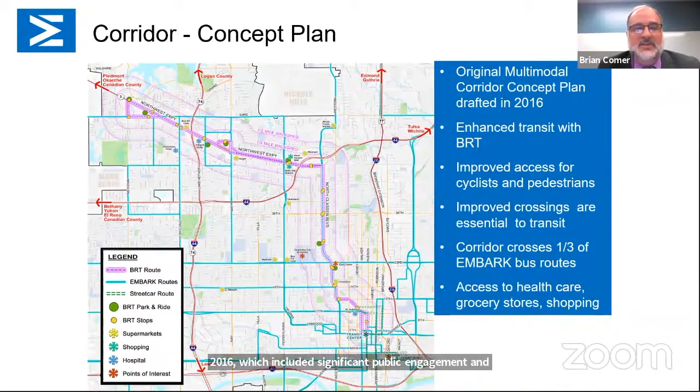The design efforts for the Northwest BRT rely heavily on past planning efforts. Jason mentioned the recent public engagement as part of the design process, but it goes all the way back to the multimodal concept plan in 2015 and 2016, which included significant public engagement and defined the preliminary route and station locations, as well as connections to major activity centers along the corridor.

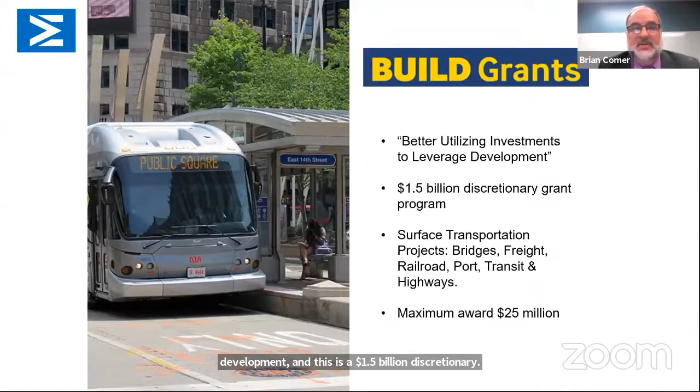The BRT is funded 50% through the BUILD grant, which stands for Better Utilizing Investments to Leverage Development. This is a $1.5 billion discretionary grant program through USDOT, funding a wide variety of infrastructure and transportation projects, including transit.

The project total budget is $28.8 million. 50% is funded through that BUILD grant, as Jason mentioned, and 50% through local match.

So the BRT system includes many different elements that I've touched on before. The first big enhancement we'd like to touch on is the technology enhancements, including transit signal priority.

And this is something that's significantly improved running times for the OKC streetcar and will also be included as part of the project on the Northwest BRT.

TSP uses technology to reduce dwell times at traffic signals for the transit vehicles by extending the green light time or reducing the red time at a given signal as the vehicle approaches.

The system will also include several enhancements to make the service more efficient, including bus pull-offs to improve system reliability and safety, and queue jumps that will allow the transit vehicle and emergency vehicles to bypass traffic and clear the intersection through a dedicated turn lane.

The BRT service will include improved service frequency, 15 minutes within the peak period, branded vehicles, level boarding platforms, and the BRT line is approximately 8 miles long and will include 16 station pairs and three potential park and rides.

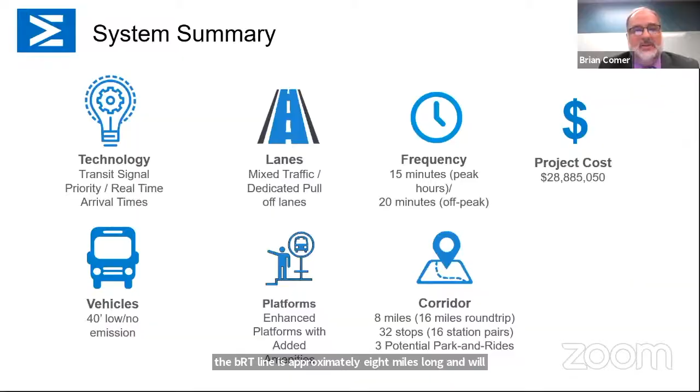Each BRT station will include a raised platform for level boarding with ADA ramps at each end of the platform, and the platform will include amenities and will be ADA accessible.

The platform will include a shelter with seating and a specially branded pylon, and the pylon will be visible from a significant distance and will serve as a landmark and wayfinding for pedestrians and cyclists looking for a BRT stop.

The pylon will include real-time information display to let you know when the next bus is arriving, provide additional information for transit customers, and potentially advertising.

Each station will include a ticket kiosk where you can purchase your fare prior to boarding the bus, a litter receptacle, and along with at least one bike rack. We would like to accommodate 2 bike racks depending upon each station and where we can fit those in.

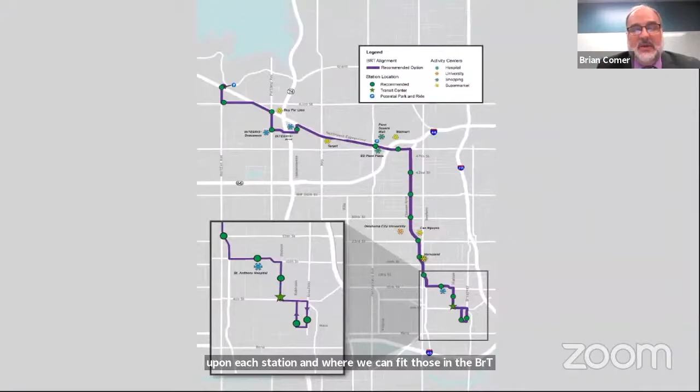The BRT alignment will run mainly along the Northwest Expressway and Classen Boulevard, and the route serves 3 hospitals, several residential neighborhoods, and provides an important connection to downtown.

The Northwest BRT, all the way back to the concept plan, is designed to serve areas of relatively high employment and population density within the Northwest corridor.

The route will come within half mile of 91,000 jobs and 23% of Oklahoma City's employment base. The route also comes within a half mile of 40,000 residents and provides the ability to connect many more residents through park and ride opportunities, especially to serve that growing Northwest region.

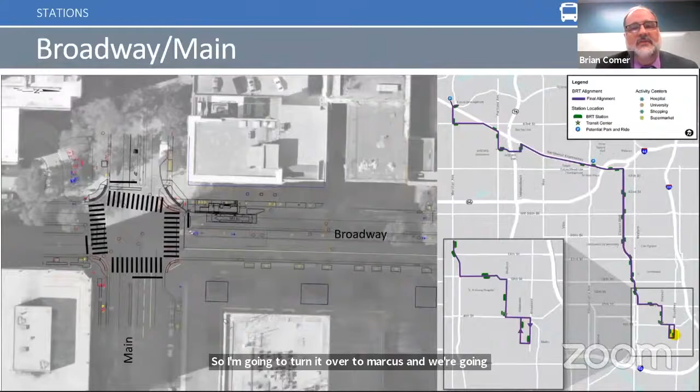So I'm going to turn it over to Marcus, and we're going to quickly walk through each of the station locations. Thanks, Brian. I guess you guys can hear me okay? Yes. Great. So thank you for the opportunity to come today and talk regarding the route and each of these individual station locations.

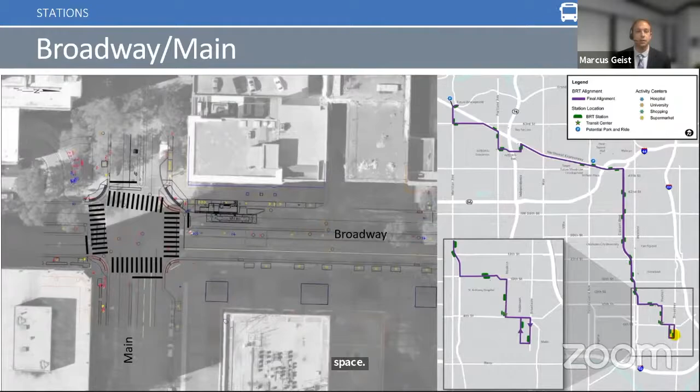So we'll turn now and go down Main and back up Robinson now. So here we're back on Robinson and Park. We're northbound on Robinson, just north of Park. And again, the station is located in the existing street parking.

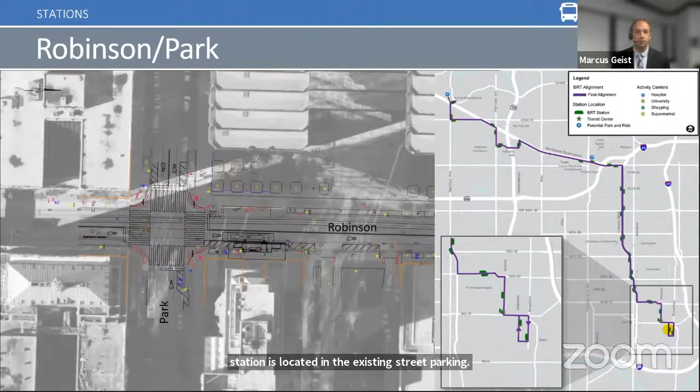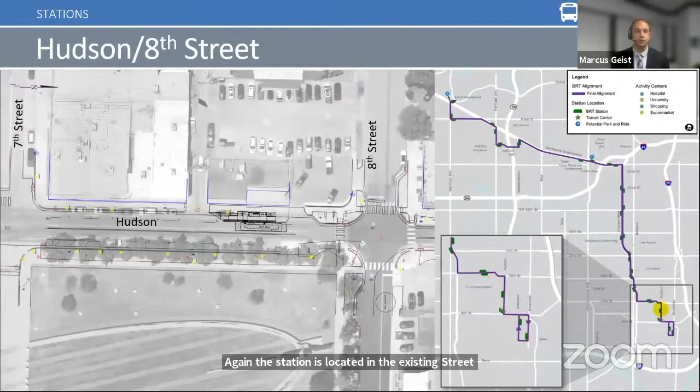Again, the station is located in the existing street parking spot. As we continue north and now to 10th and Dewey, it's between Lee and Dewey. Our inbound and outbound station are located in the Parkway and are directly across from one another, leveraging that mid-block crossing that's there today, right out in front of St. Anthony Hospital. We'll continue on now.

One thing that's unique here is that it's very similar to 4th and Robinson, where the bike lane that will be constructed as part of this project from 10th to 16th is going to be in the outside lane of Classen. The outside lane today is underutilized from a vehicle standpoint. And to prevent that conflict point at the actual station, the bike lane will actually go right behind the station and then continue along Classen. So while not shown, the bike lanes here, a part of this project, are from 10th to 16th.

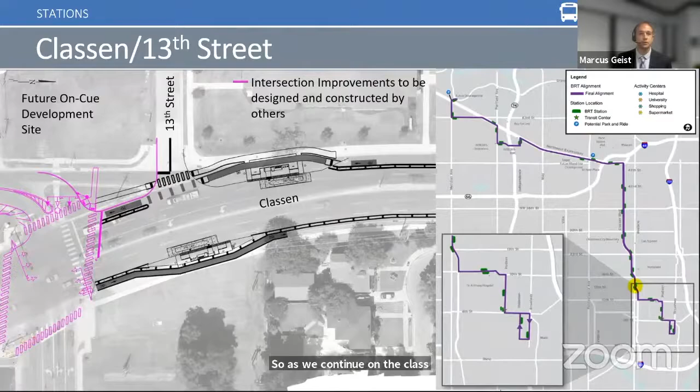So as we continue on to Classen and 18th. So here you have the inbound station located kind of in that island there, just north of 17th, with a crossing that gets pedestrians back to the signal at 18th. The outbound station here is located just outside of the Homeland grocery store.

So continuing on to 23rd, here you'll see both the inbound and outbound are on the far side of the intersection for the direction of travel, but they're also expected to be high ridership here. So one thing that's unique about this, and Brian had showed the standard station rendering, we do have a high ridership station where basically you have the same amenities, but you have a double shelter. So you have twice as big a shelter because of the anticipated folks from the traditional bus service that are going to intersect here and leverage the BRT service. So therefore, again, 2 shelters, 2 benches, and 2 ADA staging areas, really focusing on getting pedestrians back to the intersection and making sure that everything you'll see here is all ADA compliant.

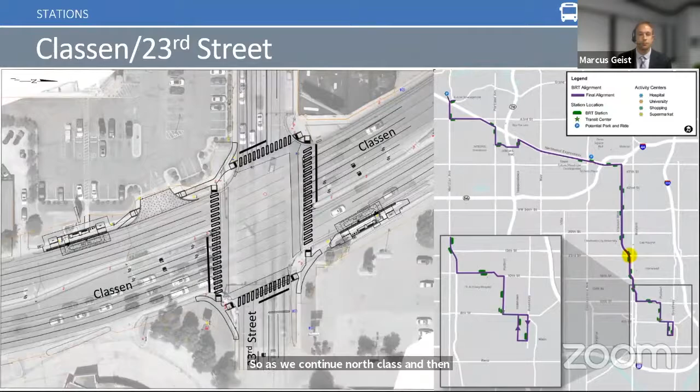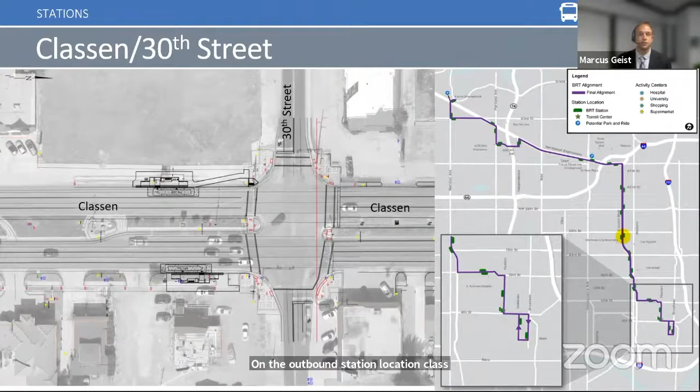So as we continue north to Classen and 30th, both of these stations as shown are located on the south side. We're working with local property owners here to understand and make sure we're modifying the appropriate driveways on the outbound station location. Classen and 36th as we continue. Here's both standard stations, both on the far side of the intersections. Continuing on to 42nd.

42nd has a unique opportunity here because just outside of NewView, on the upper side or the west side of the screen, it's assisting the visually impaired folks. So we want to make sure we've got an extremely clear and safe place for folks to cross to get to NewView and back to the stations. And we're still working with Public Works to select whether a full signal at 42nd or a mid-block crossing with a signal is best to facilitate that crossing to and from the NewView facility.

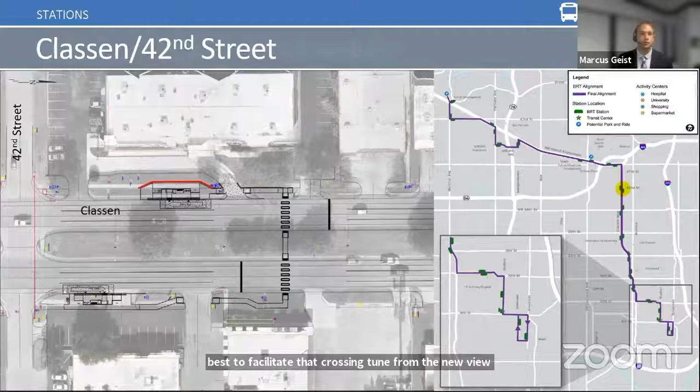We'll continue on then to Northwest Expressway and Blackwelder. So we've gone north up Classen. Now we've made the left. This is one of the locations where we have a right lane queue jump to go from the outside right lane to turn left onto Northwest Expressway.

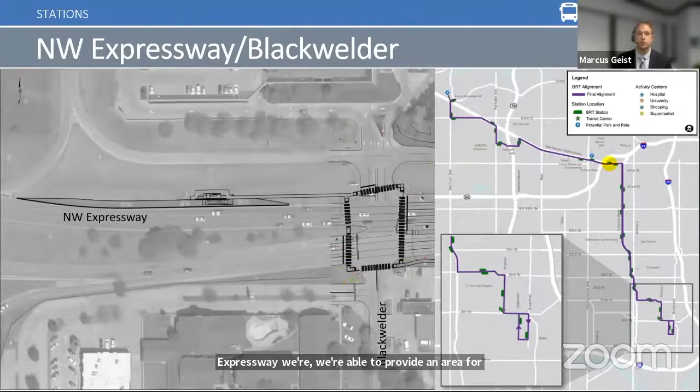The inbound station here is located in a bus pull-off area, so you'll see a common theme along Northwest Expressway where we're able to provide an area for the bus to safely pull over, board and alight, get the bus back up to speed, find a gap to merge into traffic, and again, provide that sidewalk connection to the nearest intersection. As shown here, the outbound station, just on the west side of Blackwelder, operates in a very similar manner where we have that bus pull-off zone. Again, it connects back to the intersection and provides that connectivity from a sidewalk standpoint.

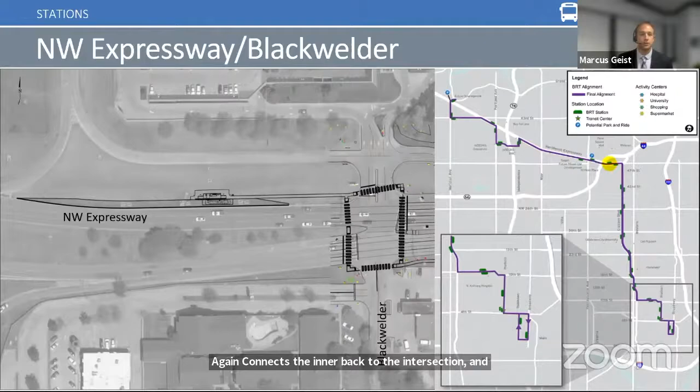As we continue now to Northwest Expressway and Penn, this station is just out in front of the Penn Square Mall. The station is positioned to accommodate an extra through lane. So again, working with Public Works and understanding the long-term plan here about having that future expansion, making sure that we're building this station in the right location to where it's not in the way for future widening.

Again, there were several park and ride locations that Brian talked about. This is just one of the general areas that will have a park and ride. So the inbound station here is on the west side of Penn. Again, similar scenario here. It's positioned out for future widening along Northwest and provides that bus pull-off area. So we'll continue down Northwest and head north on Independence.

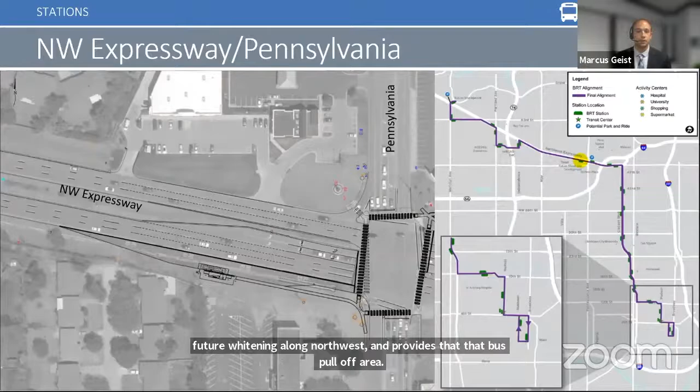So here, the stations are located just south of Northwest, again, outside of Integris Hospital. One of the locations here, if you're familiar with the area, has a pretty aggressive slope that heads down towards that parking lot. So this is one of the locations where there will be a retaining wall on the project. Again, connections back to that existing crossing as part of this project.

So we continue now south and we turn and go west on 56th and head over to Portland. So you'll see both stations here at 56th and Portland are along 56th. Both of them have ADA improvements back to the intersection, but it's key here that both stations either have direct connections or sidewalk connections to part of that existing trail network.

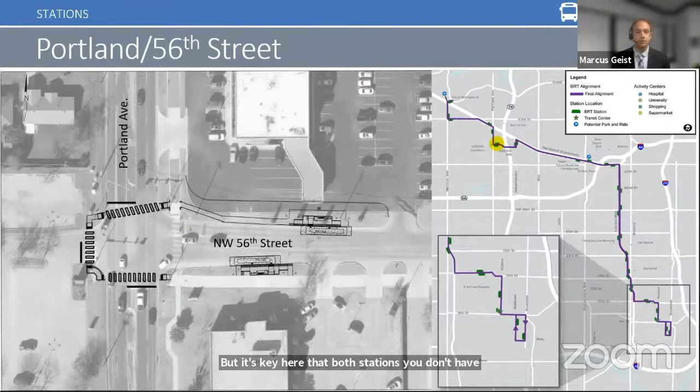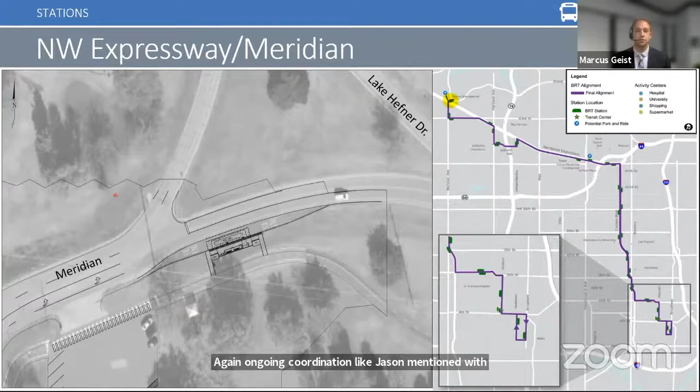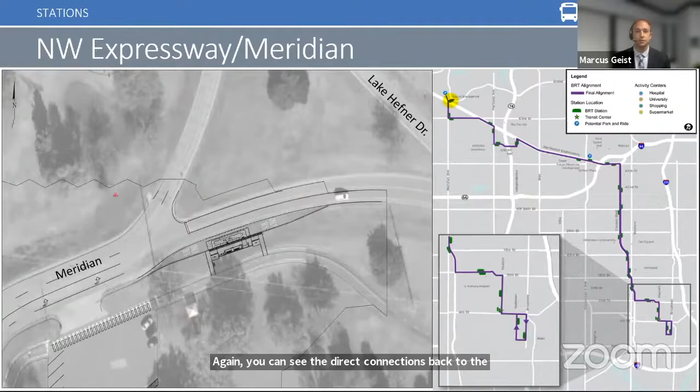So as we continue then to our last stop, which is Northwest Expressway and Meridian, this is the end of the line station. It's expected to have high ridership here because of having a park and ride in this area. Again, ongoing coordination, like Jason mentioned, with development in this area to accommodate how the bus is going to turn around in this triangular area, the potential park and ride, and how the station ties in with the future mixed use development here. Again, you can see the direct connections back to the existing trail, leveraging the trail network that's already in place. And with that, I'll turn it back to Brian to talk about park and ride considerations and the overall schedule.

So park and ride is a significant portion of the service, and that end of the line station at Meridian is one of the key areas that we identified for the park and ride opportunity. As I mentioned before, the project team is currently evaluating 2 additional locations other than Meridian and Northwest Expressway, and working with property owners to identify improvements and connections to each of those locations.

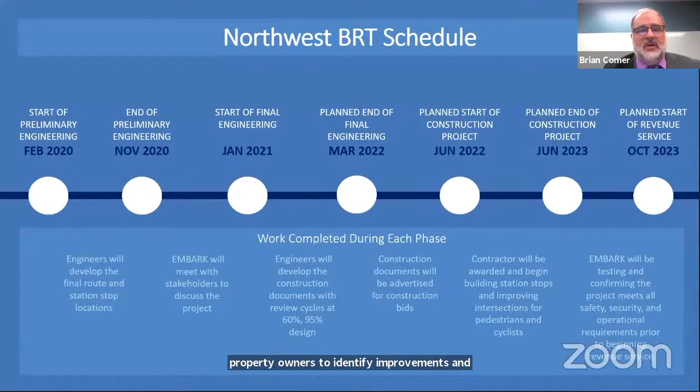In terms of project schedule, as Jason noted, we're at the 30% design level in terms of the preliminary design report. Final design is scheduled to complete this year with construction next year, and the planned revenue start or opening is planned for late 2023. That really allows ample time for the completion of construction to include the testing phase and working all the kinks out in the system, similar to what you went through with OKC streetcar.

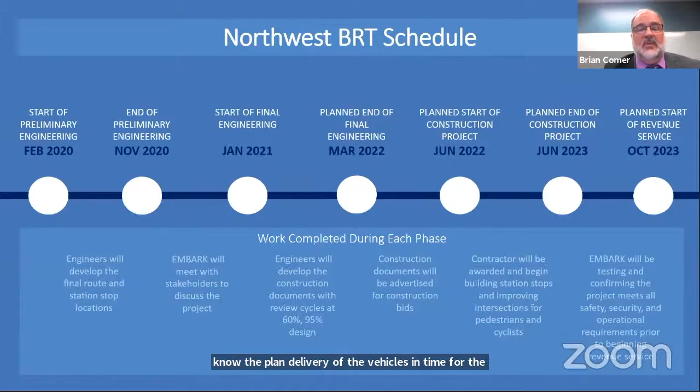So we've outlined the schedule, and that also includes the planned delivery of the vehicles in time for the testing between construction and the planned revenue start in late 2023. So with that, I will open it up to any questions.

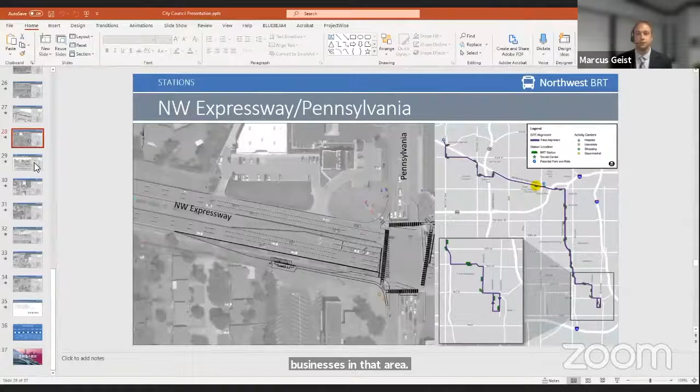Marcus, this is Mark Stonecipher, from Ward 8. One question I had at Northwest Expressway and Portland: when our riders disembark there, will they have easy access to the grocery stores, restaurants, and other businesses in that area? Yeah, with every one of these stops, the intent is to get them back to existing infrastructure, and coordinating with local match projects that have other sidewalk projects that either tie to it or continue the momentum forward of getting folks to these attractions.

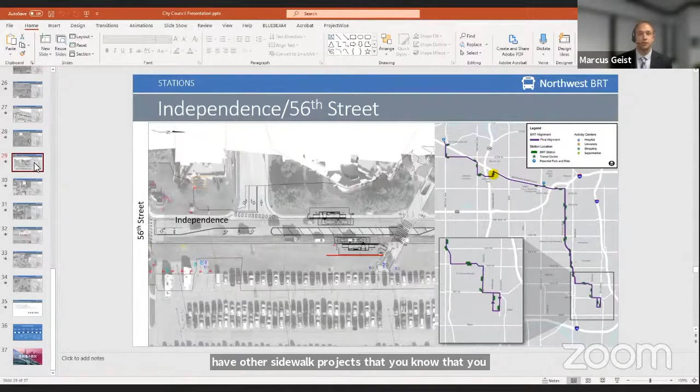I have a series of questions and some comments, actually. First, before I go into those, let me just say, and everyone already knows, I'm a huge supporter of not just public transportation and walkability and bikeability, but very specifically this BRT project. So much so I worked with Councilwoman Hamon to ensure we got 2 more of them in MAPS 4, one to the northeast side and another one to the south side. So that will be part of our future over the next 10 years. And of course, we know that a regional transit authority conversation is coming as well.

So when you all talk about people being able to use the BRT to connect to a streetcar downtown, God willing, we'll have light rail connecting Edmond to Norman before it's all said and done, and some sort of rail service connecting Bricktown, Tinker. And then people can use the BRT to connect to those services. That's where my brain always goes. But more immediately,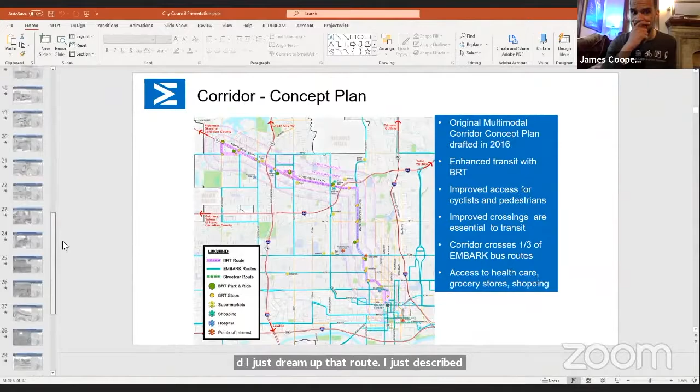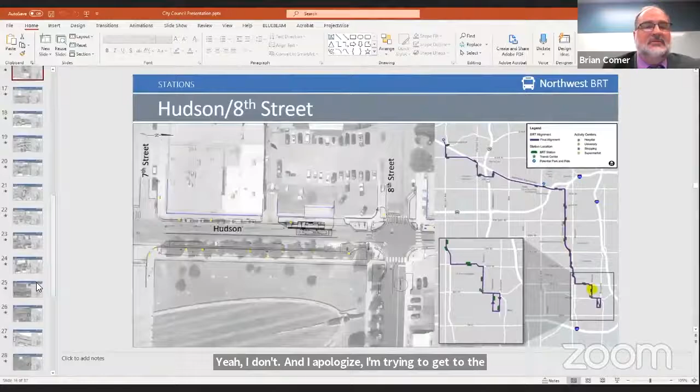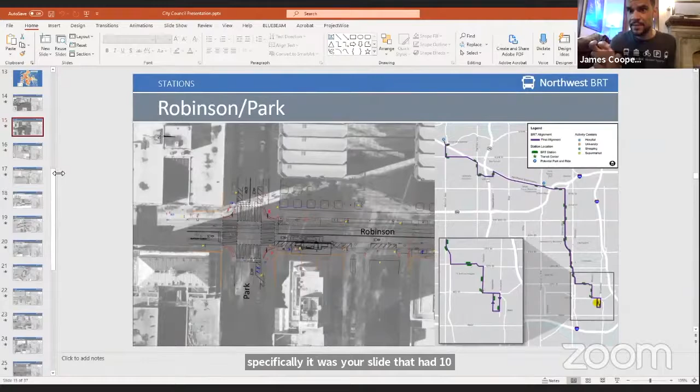Yeah, I don't, and I apologize. I'm trying to get to the route map. So can you ask the question again? Sure. It was specifically your slide that had 10th and Lee. That's why it stood out to me, because I never remembered a 10th and Lee previously. And again, December was a crazy month. Been wacky, I'll just say that, and wacky year. But Lee and 10th Street was one I don't remember previously being part of the conversation.

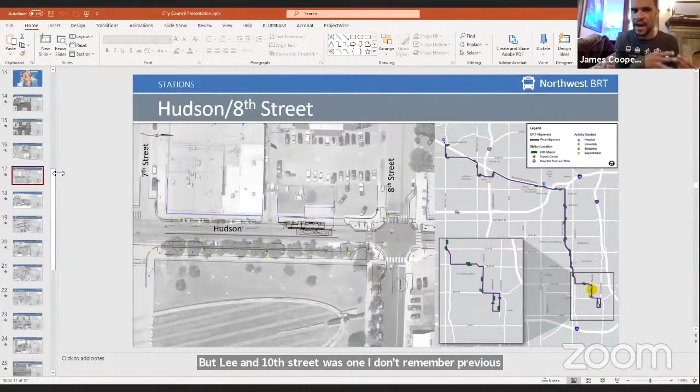I remember Hudson down to 10th, then you head west on 10th, then you go around the roundabout, and then you head northwest along where Villa Teresa and that row of developments are. Yeah, so I don't ever remember this. Was this always the plan? And I don't know. Councilman, I can answer that.

Yeah, we've been looking at just 10th Street West out of downtown for a considerable amount of time. I know you've been associated with the project really since it was in the concept plan. We may have shown some variations of coming out of downtown, like when we had our public engagement during the concept planning stage, as we were gathering input on what the final route design would look like. But yeah, we've looked at just 10th Street for quite some time now. I think that's really the only street we've looked at coming out of downtown since HNTB has been involved.

So that might have been part of the concept planning when we were still trying to decide, do we stay on Northwest Expressway, for example, or do we go down Independence and serve Integris and Deaconess? I think there were a couple of variations of how we could get out of downtown. So you're probably remembering 13th correctly as an option, but we shouldn't have shown anything recently with that in there. If we did, it was simply our mistake on a slide. But it has been 10th Street.

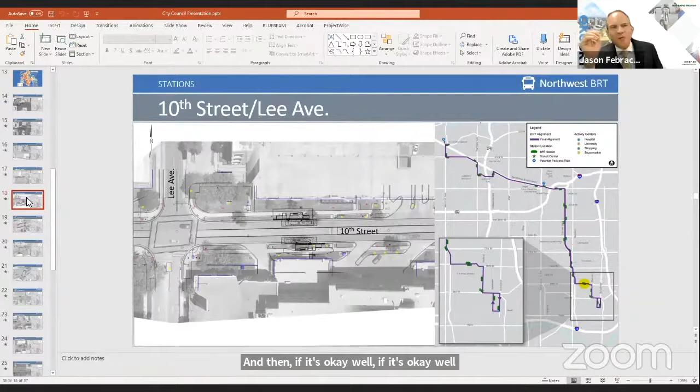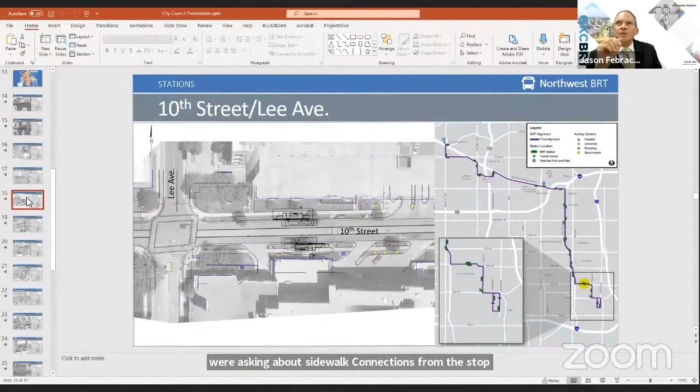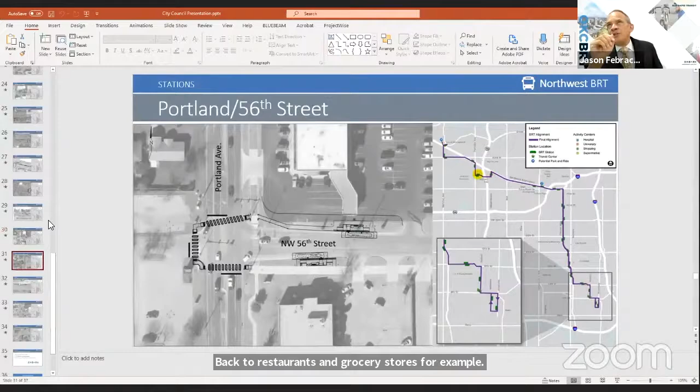Okay. And then if it's okay, while I'm off mute here, I did want to go back and answer Councilman Stonecipher's question a little more specifically. When you were asking about sidewalk connections from the stop at Portland and Northwest Expressway back to restaurants and grocery stores, we do not have a sidewalk heading back east connecting towards On the Border or the barbecue restaurant on the corner. We do, of course, have the connection to the multi-use trail that goes to the west.

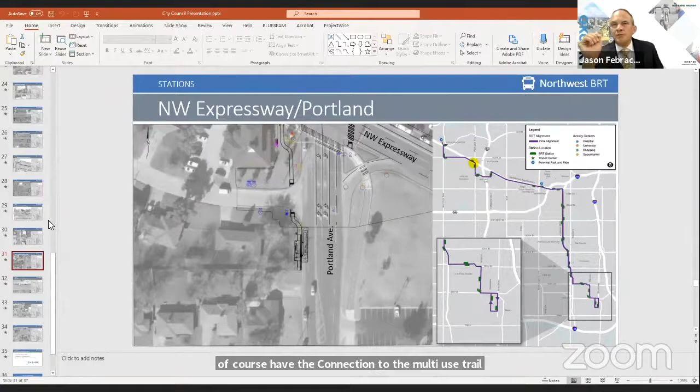I didn't know if that was the specific area or restaurants you were asking about. It wasn't so much the restaurants. It was the grocery store that I think would be helpful for our riders. Yeah. And so especially with the outbound stop, they'll have access to the Buy For Less there.

So this takes me back to my series of questions then. I'll save that one. So, okay, 10th Street, that's interesting. I know I've mentioned this at recent COTPA meetings, and in private with you, Jason. I think why it keeps popping up in my head, can we go to the 23rd and Classen one, please?

Okay, so the reason why I keep mentioning crosswalks and continental crosswalks and their width is those don't look very wide to me. And again, I know I'm just looking at a rendering, but I just cannot stress enough how important, especially at this intersection, that crosswalks are just as wide as humanly possible. You're talking about 4 major connectivity points. And so that's why I keep bringing that up.

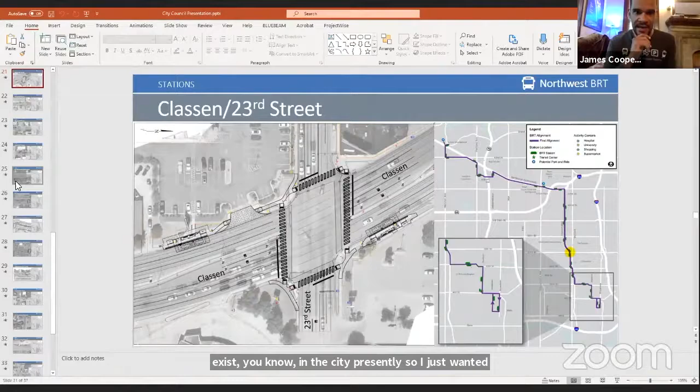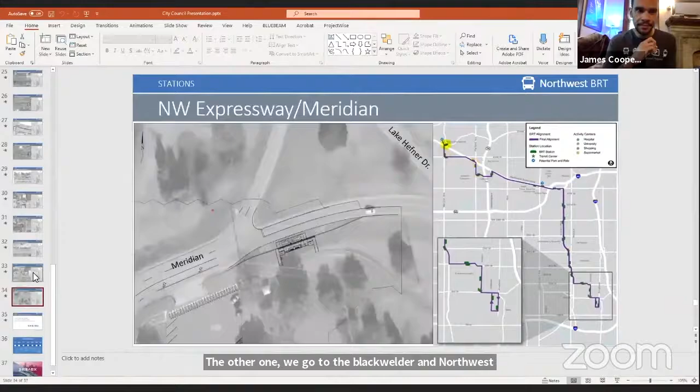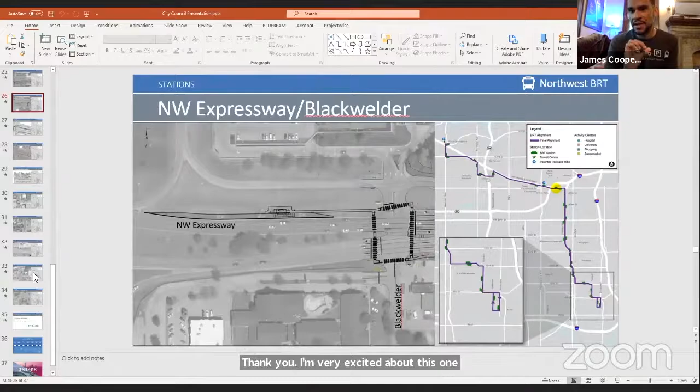The other one, can we go to the Blackwelder and Northwest Expressway one too, please? Thank you. I'm very excited about this one, particularly as it relates to the Bike Walk OKC revisions. I suggested, though I am but one voice, that Bike Walk give very serious thought to, at this particular intersection, the bike connectivity from Blackwelder, because that's a neighborhood, right? The neighborhoods, plural. Whether it's Military Park, Putnam Heights, there are neighborhoods there.

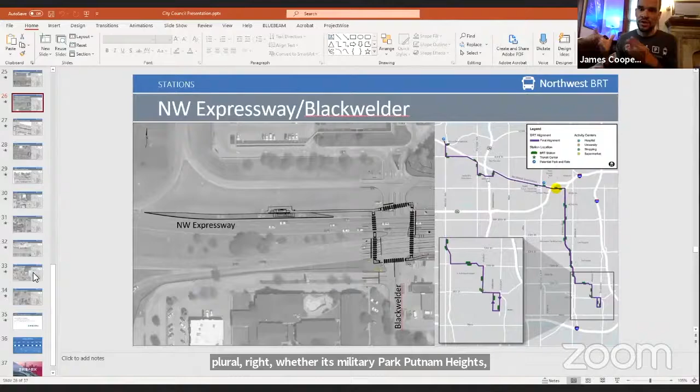And I think that someone should have access with a bike to this intersection, not just to connect to the BRT, but here's, I think, the challenge. Getting across that street on a bike to work or shop at anything at Belle Isle Station or Penn Square Mall, to me, I just feel like that's such a necessary thing. As someone who has tried my darndest to bike to either of those two locations from Paseo, it's like the last level of a Super Mario game when you get over there. It's just impossible.

So I'm just wondering, on that north side of the street, what I suggested to Bike Walk was a cycle track along that side of the road. So I would just voice the need for that. Because again, it's not just about the shopping across Northwest Expressway. It's about the person who's using their bike. Again, it's National Bike Month. I believe the meeting began with that.

It's about someone using, I saw Mark smile with that one. Thank you, Mark. But it's about getting the person who's using their bike as transportation to get to work. And as we just heard, we have so many jobs along this route. And so I just really would like to see us think about that for this side of the road.

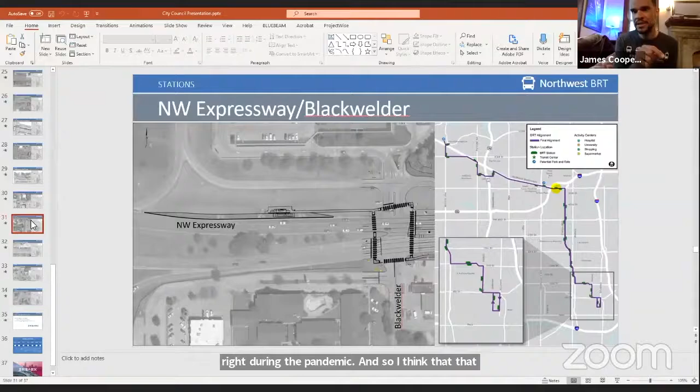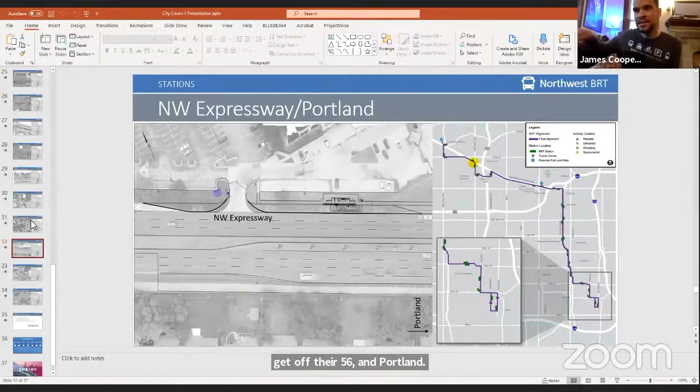We are talking about our service industry, an industry that, I'll just remind everybody, has just been through the fires during the pandemic. And so I think that walkability component, someone who's using the BRT to get off there at 56th and Portland, they should be able to get off right there and walk east to go to work at Clark's. And until this slide, I did not realize that was not part of the conversation. I'm just going to keep emphasizing that. I think that is an incredibly missed opportunity.

And so what we're going to end up with is workers walking along Northwest Expressway, a 6-lane traffic corridor called an expressway, to get to work. And that's to say nothing about families, or people on dates or on their own, going to eat at any of those restaurants. I think that's just an incredibly missed opportunity, and I would really like to see us rethink that in terms of sidewalk connectivity there. Had I known that was missing, I would have proposed it in the Bike Walk OKC revisions. And maybe, since I know planning staff are listening to this, count this as one of those revisions.

And then I would also say, again, I can't stress enough, from Independence to Meridian, because there's Panera Bread, there's Schlotzsky's, there's all these different places. And I just think connecting people to those places by foot and by bike and by BRT is what we need to be thinking about here.

I would also say, and I'm going to sound like a broken record here, I'm really excited about the 15-minute frequency during peak. I remain gravely concerned about a 20-minute frequency during off times, because first, what are the peak hours?

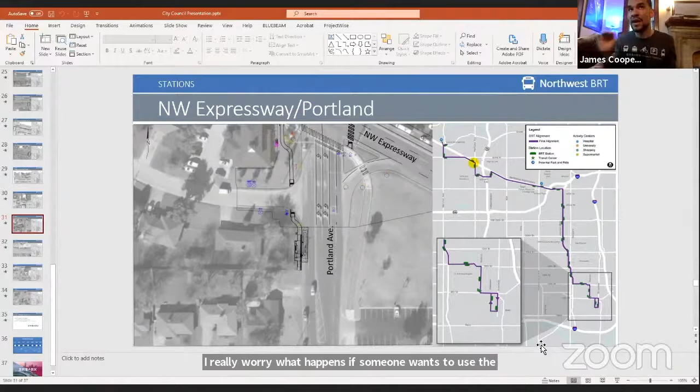I'm talking going to dinner at 7 p.m., 8 p.m., 9 p.m. in Uptown, in the Asian District, in the Plaza District, in Midtown, in Bricktown, in downtown. I really worry what happens if someone wants to use the BRT for those sorts of things. And that's for recreation and consumption. Again, the worker here should also be, right? That's what I've always loved about Embark. I think we excel at customer service. That is what you all have taught me since I started serving on the trust.

What are possibilities for the evenings and the weekends? Because I guess my point is if people think it's 20 minutes, they might associate that with those peak times too. And I think it could create a negative perception of the entire system. So that's why I really feel like we could just get that 15 minutes consistently. So that's another thing I'd want to say.

Yeah. I think, no, definitely duly noted. And we will take all that into consideration, of course, when we finalize our operating plan. And as a COTPA trustee and council, we'll certainly get that in front of you as soon as we have it. I do think, though, we'll be able to borrow from our experience with the streetcar a lot, because we run peak and off peak with streetcar. And from a marketing standpoint, and really trying to communicate the value of the service, most of our messaging, if not all, is generally around that peak service time,

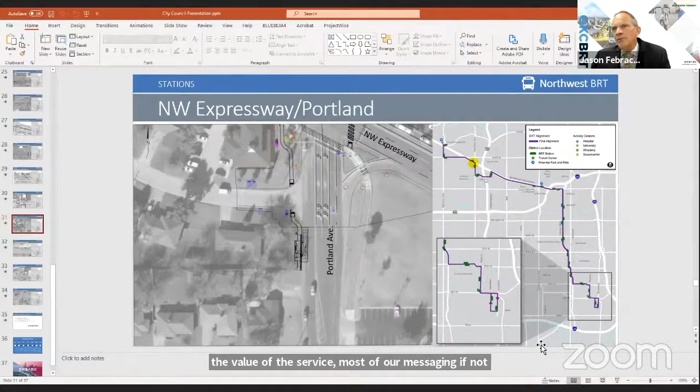and I would suspect we would do the same with the BRT, trying to convey the difference between bus rapid transit and regular bus service. It's, hey, peak frequency is 15 minutes. So that's what we focus our message on. So, to your point, we don't have customers thinking, oh, well, that's only 20 minutes. That's not a dramatic improvement. When really there's a minimal amount of hours, if you will, that we're running that off peak timing.

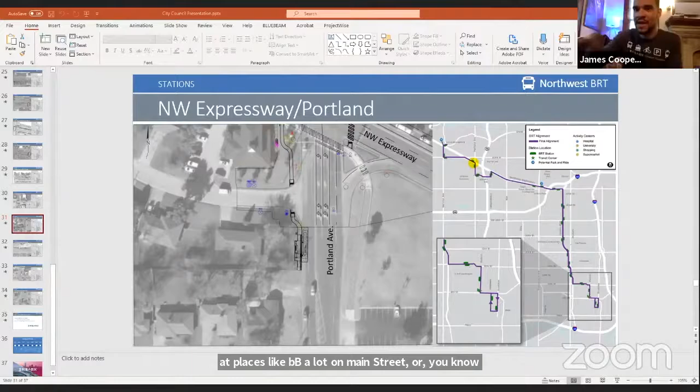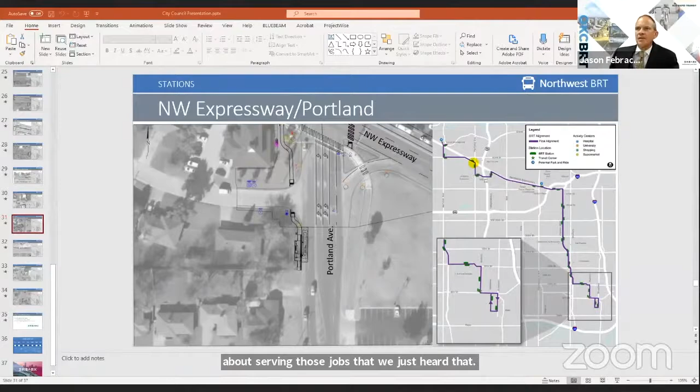Again, I guess what I'm really, and it's crystallizing in my head now, I just have so many friends who work in the service industry, so many. Who work at places like Bar Balada on Main Street, or Kitchen 324, all these different places, and our customers, they are working in these jobs 10 o'clock, 11 o'clock, 12. And I just think we need to really think about serving those jobs that we just heard that are along the route, and that those jobs are not just that traditional 9 to 5. They're not even close, right?

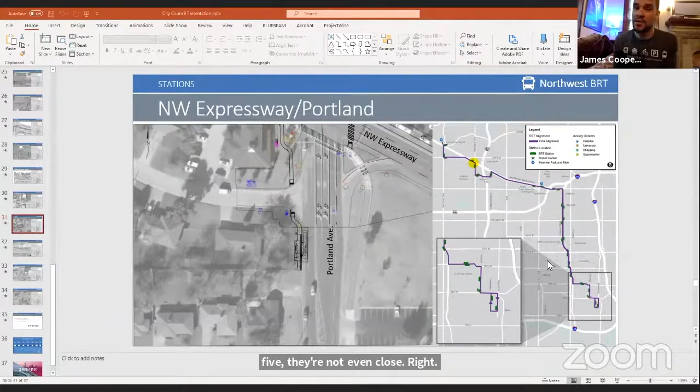So I just really want to push us on, I really want to challenge us on this topic of the worker and the timing and the frequency. And I think that's very important. And then my final thing, I know I might not get my way on this, but I'm going to voice it all the same. I'm hopeful about it, but I think it's very important that those new sidewalks that are coming along the route on Expressway and on Classen, I know the budget doesn't allow for trees as a canopy, which was a word I heard earlier in this presentation, but that's something that I'm working on to try and secure, because I believe very, very strongly

from all of my years serving on COTPA and attending these transit conferences, that for the pedestrian in that first mile, last mile from their home to these wonderful new stations, that walk or bike ride needs to be as accommodating and pleasant as possible. And trees on a prairie, which is where we live, right, adds to that experience. And so I just want anyone who's listening to know that we are thinking about that. I think that's very important. And then to conclude on this topic, I would hate for anyone who just heard me walk us through my questions and comments to think that this is a negative reaction to the presentation or to bus rapid transit.

I know in Oklahoma we have a habit of everyone thinking we're very nice people, and I think a lot of that comes from us just saying nice things to each other. There's often a lack of constructive criticism, but that's just not the world I come from. I'm an Oklahoman, but I come from a film criticism background, so I can love a movie, I can love Casablanca or Citizen Kane, and I can still point out how it can be even better. So that's all that's going on here.

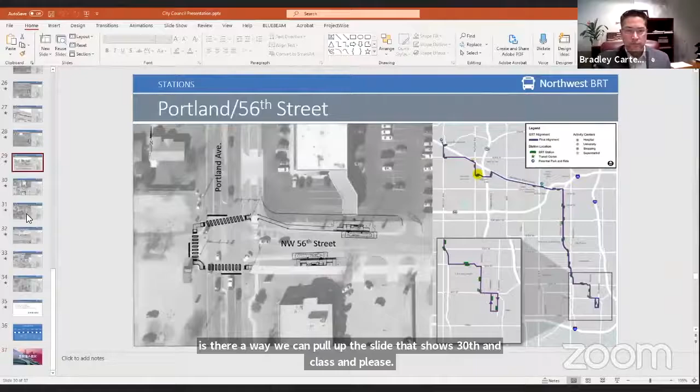Is there a way we can pull up the slide that shows 30th and Classen, please? Thank you. So I have a couple of acquaintances who have reached out to me concerning this area and some of the bus stops proposed that would end up actually blocking their businesses. Specifically a restaurant, they're on 30th and just off of 30th and Classen, and it's just going to end up being something that blocks their restaurant. He's reached out to...

Let me read this, I apologize. The assistant city manager's office trying to get some information. He says he hasn't really gotten any calls back, and he's having an issue with being able to get some more information on it. Are we going to be blocking driveways into businesses with adding these things?

So it varies from location to location, but there are some driveways that will potentially be closing. In this particular one, we have met with the owner of that restaurant a couple of different times. In fact, I'm working on a meeting to go see the owner and visit with him myself about transit and his concerns. Again, we are just at 30% design, so we have opportunities to look at other locations.

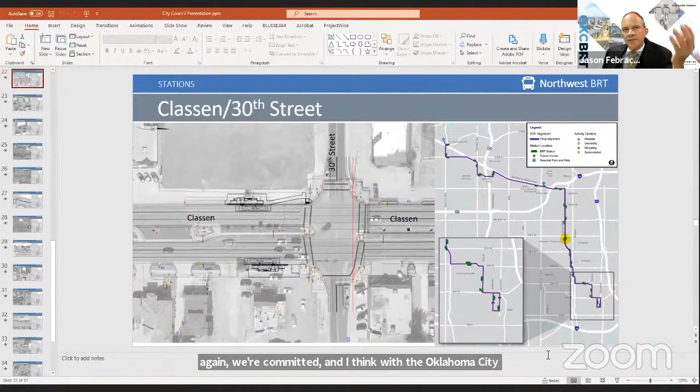Again, I think it's just a matter of how the particular business owner looks at it. Is it bringing customers to their business, or do they think it's impeding visibility from the street? But again, we're committed, and I think with the Oklahoma City streetcar as our track record, if you will, we are all about working with the business owners. We can't always make 100% of the people 100% happy, but we do make adjustments to the project based on feedback from those along the corridor.

That's why we have a stakeholder work group made of people along the corridor. That's why we're meeting with all the business owners. And if there's a solution here that we can come to with this particular restaurant owner, or really any business along the route that has concerns, we're definitely going to do that.

We've had an opportunity to engage a business at 42nd and Classen that had some similar concerns, and we evaluated that intersection, and there's a strong likelihood we'll be moving that platform. So we are open to trying to work with the business owners, and I'm happy to brief you or council on the outcome of my meeting with this gentleman here.

No, I'd appreciate that, please. I know specifically on this one, there's an entrance on 30th to his restaurant as well as Classen, but Classen being the major thoroughfare that it is, in no comparison to 30th whatsoever, it would completely get jammed up in this specific situation. So anything you're able to find out or discuss with the owner, I would greatly appreciate knowing.

Absolutely, thank you. And I have a couple follow-ups to the two other councilors, if I may. One, I want to echo Councilwoman Hamon's notes about the bump outs. Literally in my mind, and I've already said this to Jason, I think of the OKC Boulevard right next to Scissortail Park, wide crosswalks and these wide open spaces at those corners where people can gather as they're waiting to cross the street.

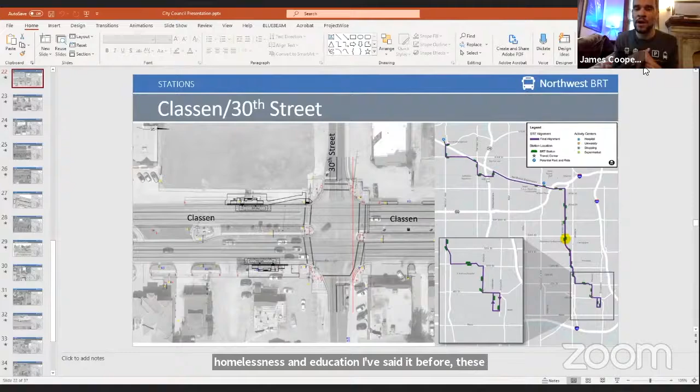So again, when I look at 30th here, or the possibility of a signalized 42nd Street, or again that Blackwelder, I would like to see each one of those intersections have wide continental crosswalks, and then some sort of bump out that says to a family of 4 or 6 or a couple, as they're waiting for that light to turn green to walk across those crosswalks, that they just feel safe even waiting there.

And think about it, you look at this grassy field across the street from where we're talking about right now, development itself I think improves when those intersections have more gathering places for pedestrians. I think it allows more people to take advantage, being able to walk to shops. So that's just my challenge here.

I really appreciate Councilwoman Hamon's comment. And then to Councilor Carter's comment, I actually received an email over the weekend for me to call the owner of that particular pho restaurant.

Jason, real quick, as I know there's often a lot of confusion when it comes to transit and property values, do they go up or down when transit comes to a neighborhood, like BRT or streetcar? Just curious. Generally speaking, BRT and streetcar result in increased property values. Increased property values, good, I just wanted to make sure I understood that correctly.

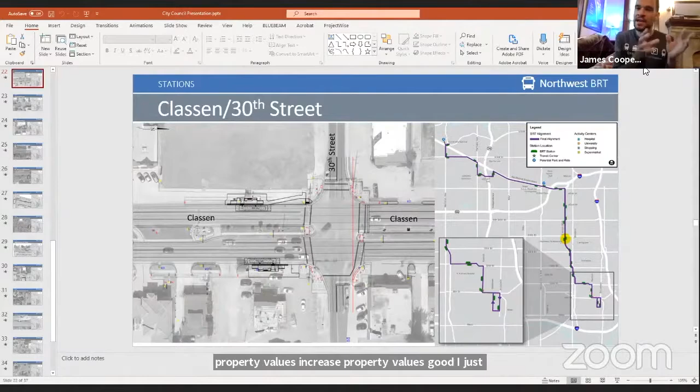I also want to remind everybody following along this presentation, I know we went in depth with this back in October with a zoning case, but I want to really remind everybody, this might not be a familiar thing to people who haven't lived in cities where there's that kind of reliable transit.

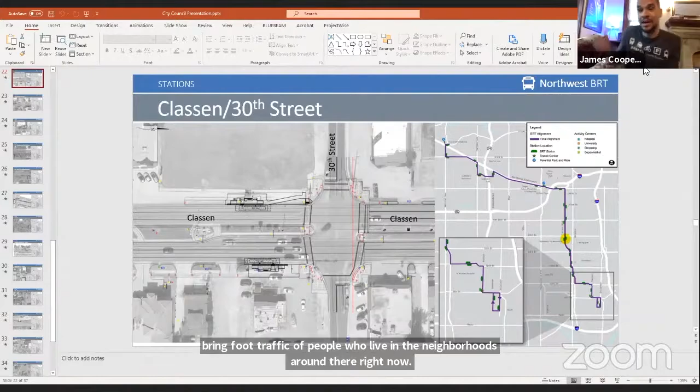We already go to these pho restaurants because they are amazing. We already go to CVS because they have the basic needs of the individual. We go to Lee's, right, because they are also incredible. That sidewalk infrastructure is about to become a game changer. It is going to allow people access to these businesses in a way we've not had before.

In other words, property values will rise, revenue to these businesses will rise. And what must also go away in this conversation, I will say, is stigma.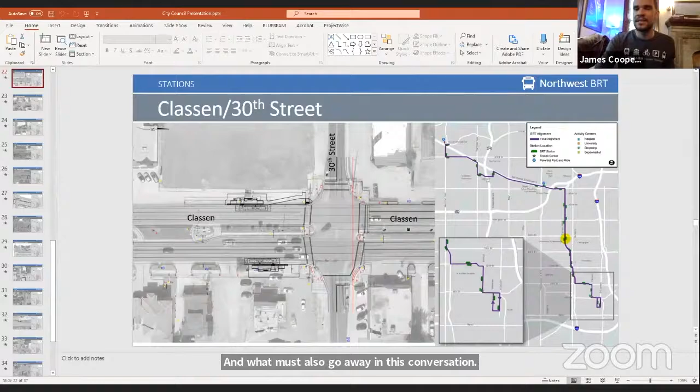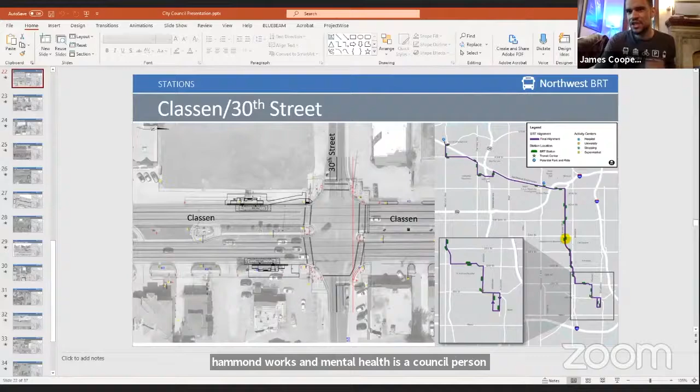Stigma about who uses public transportation. I use public transportation. I am an adjunct professor, a former middle school college preparation teacher right here in Oklahoma City Public Schools. Councilwoman Hammond works in mental health, is a council person, uses public transportation. Councilman Greenwell, an accountant, uses public transportation. This stigma must also disappear from our minds.

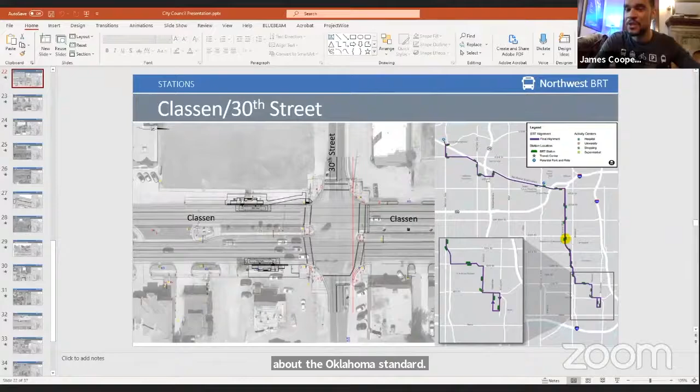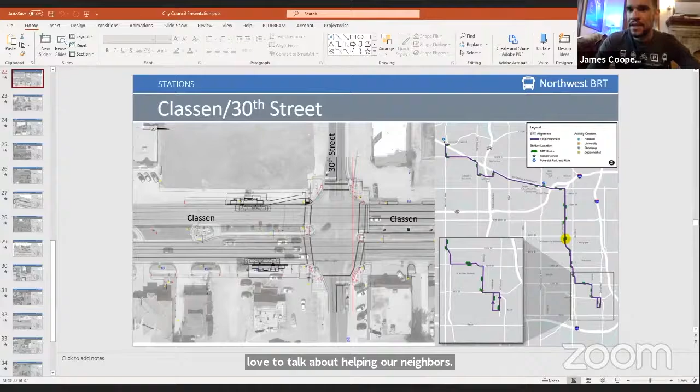And quite frankly, that stigma, we must really stop and ask ourselves. At the beginning of this meeting, we talked about the Oklahoma Standard. We love to talk about the Oklahoma Standard. We just came out of the anniversary of the OKC bombing. We love to talk about helping our neighbors. Those without a home, experiencing homelessness, are also our neighbors. And that's all I want to say about that. Thank you.